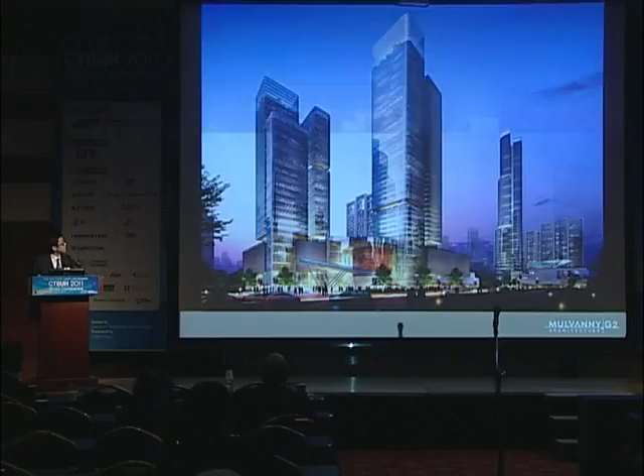Here I can share some of the projects we have designed or that are on the design board. This is the Suning Chengdu Plaza, which I'm going to speak more about in detail today. This is the Wuxi Chong'an mixed-use development with twin 250-meter tall towers and a 6-floor retail base. And the Suning Beijing Plaza. And again, Beijing Chaoyang CBD expansion, master planning. And the China Resource Qingdao mixed-use project.

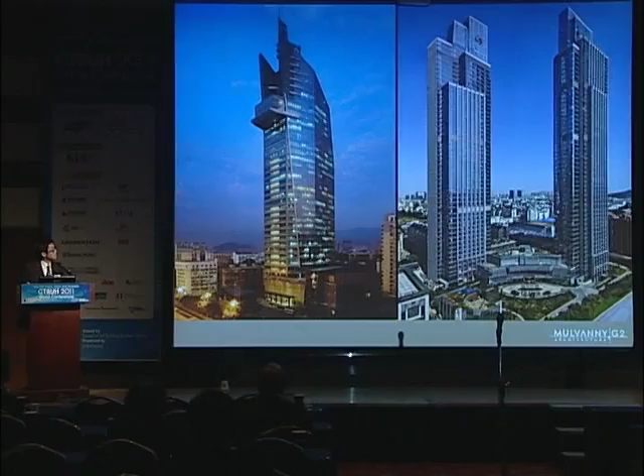And Bayview Towers in Washington State, also the first LEED gold certified residential towers in Washington State. On the right is the Suzhou Sunny World, twin 50-story towers with retail, restaurant, and club base. And Xi'an Daming retail mixed development, totaling over 2.5 million square feet.

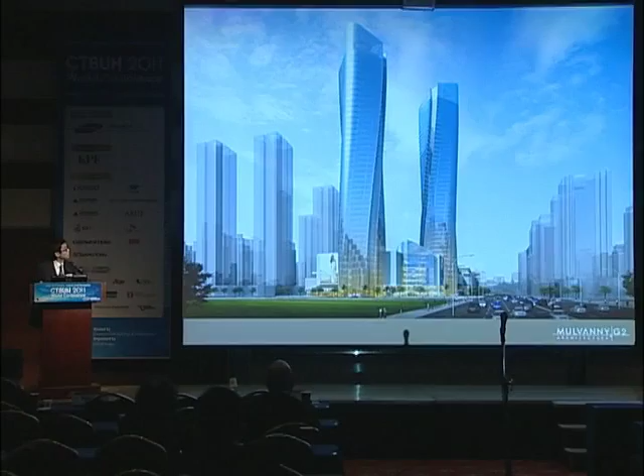As everybody knows, mixed use is a very complicated program and requires a lot of design strategies. Today I'm going to share some of the most important strategies we apply in our mixed-use design.

First is humanity. All mixed-use projects are about creating synergy for a destination, so it's very important to create life, especially at the street level. I think some speakers already mentioned that. So how do we respect human behaviors—everybody wants comfortability, everybody demands convenience. They like to have exciting, fun, social space, but also some private, quiet space. And they like to have adventure space, but it also has to be safe.

And of course, all mixed-use development critically depends on how to make sure the economic effects are met, and it has to be affordable for the people who live in the city.

The second important design strategy is cultural relevance. Great communities and cities exist because of thousands, hundreds of years of history, and people are very much comfortable living, working, and playing in this kind of environment. So how are we able to respect the local history, the local culture, and also critically, how do we interpret what it means to create an urban space in today's time and also in the future?

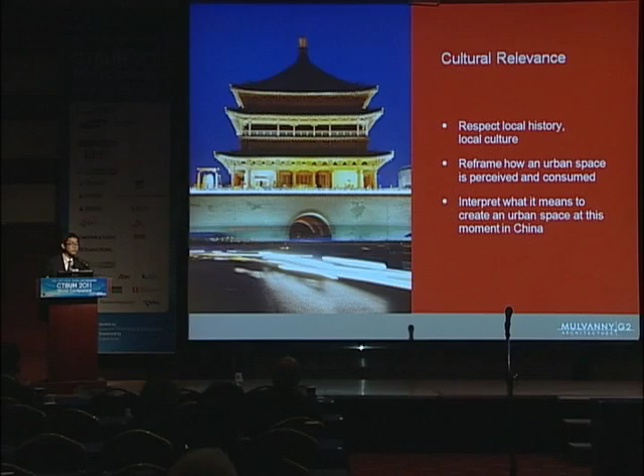Last but not least is sustainability, and as everybody has emphasized, it's so important. If you think about a mixed-use development, it is in itself a very sustainable approach, rather than spreading very horizontally, which takes more effort in transportation. Here we try to create a walkable, very robust community.

Without needing to travel to different places to serve your purpose. But beyond that, we have to look at the long-term strategy for both business and environmental needs, and also how to be relevant—making sure this approach is very relevant to the local culture or climate, and integrate all this together at different scales.

Next I'm going to use, hopefully if I have time, a couple of case studies. First is the Suning Chengdu Plaza, which just completed the relocation process. This project is located in the old commercial retail district, probably one of the most expensive land areas in the city.

As you can tell, it's a very tight site. We try to solve a very complicated, almost 2 million square foot project on a very tight site, with FAR over 15. Also, how are we able to let a world-class retail center coexist with the relocation of existing retailers, which are smaller local vendors—how can these two coexist in such a tight location.

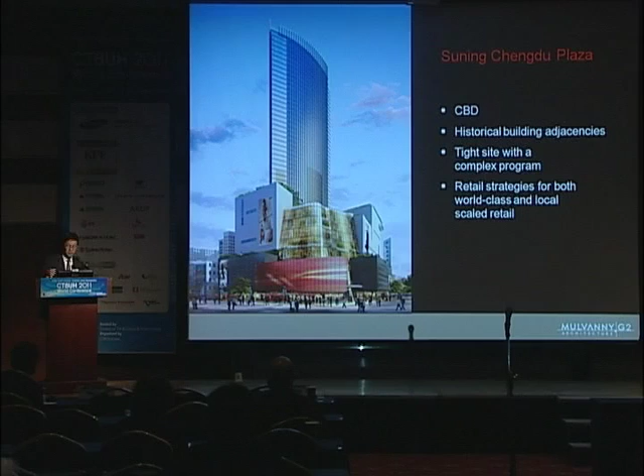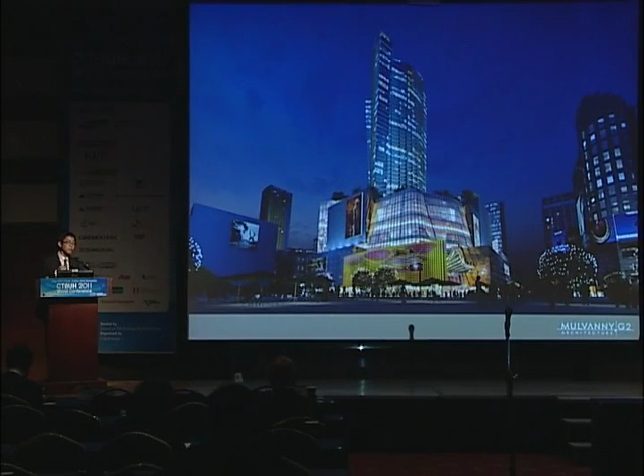And also there's quite a few historic buildings adjacent to the site, so we make sure to respect this context. This is a night view, shows how important the lighting design, the LED, and also the commercial graphics really help to create that destination for the city.

And interior shot really focus on bringing the daylighting from both the skylight and also from the exterior wall, so it really penetrates all the way through inside at this atrium space.

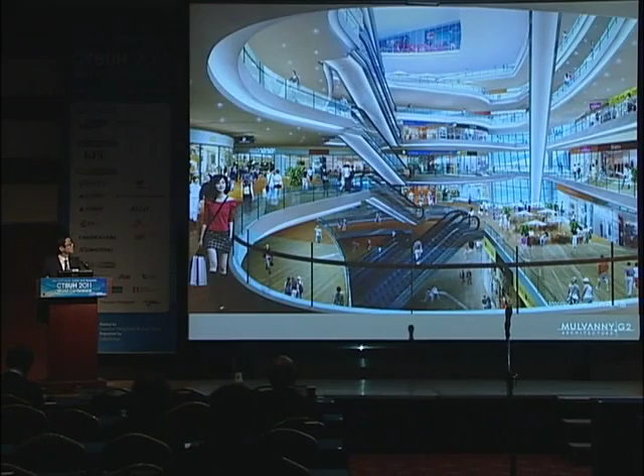So briefly, the city of Chengdu is pretty much in the middle of China, and also the site is based pretty much in the middle of the city of Chengdu. So that's the site.

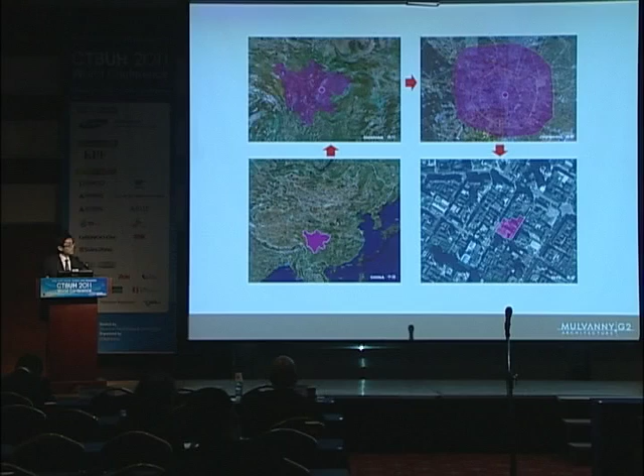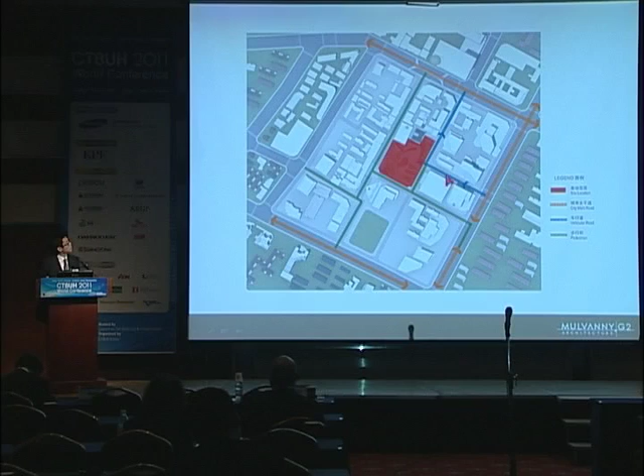And as you can see, this site is really in a major old commercial retail street. So all this green is a pedestrian walking street. Only half of this street is accessible by automobile, it's a one-way street, so the rest of this is all pedestrian street.

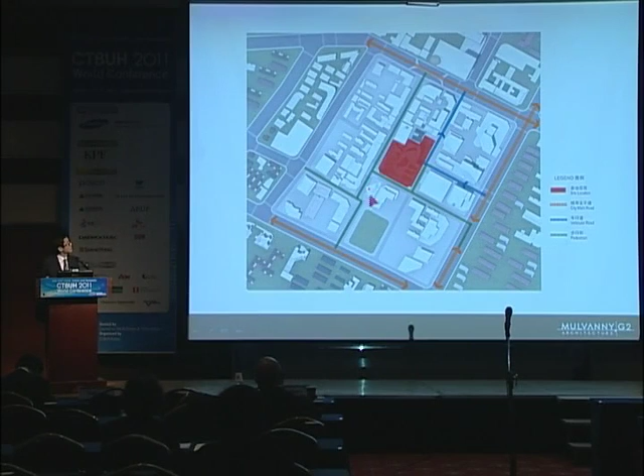So it's kind of challenging trying to solve all this into one very tight site with limited auto access. And on the south side there's a city plaza, and on the north side is this historic building, the YMCA.

So the initial planning diagrams really try to turn the challenges into inspirations, like this three-sided site really becomes a major access for all the retail. So we provide a retail entry along all the site, and also take advantage of this south city plaza, becoming part of the main retail entry experience.

And relocate and put the most luxury brand special retail stores in this most expensive corner, put the anchor store more in the secondary corner, but still with enough pedestrian access from different sides of the street, and put the hotel and office towers along this access by vehicle, just to make sense.

And also the relocation on the back side, taking advantage of this emergency fire lane, turning it into an open, traditional local market street experience.

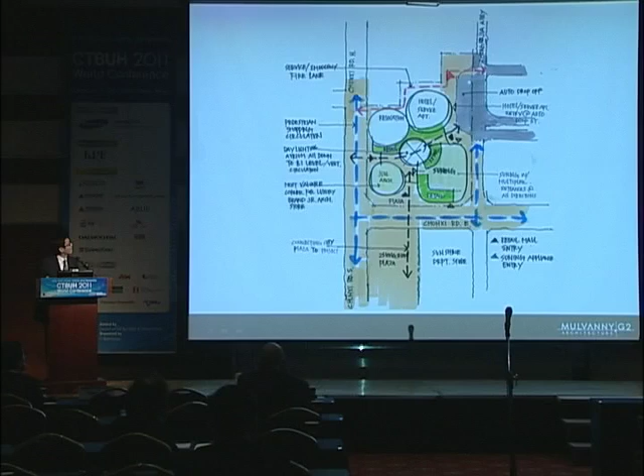This is more defined in a transportation traffic diagram. Another thing to mention is creating a sunk plaza there, which really not only exposes the historic building, but also creates direct access to the retail at the basement level.

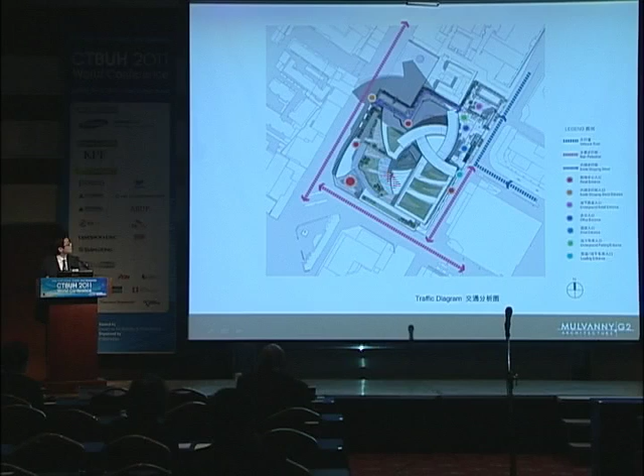Really taking advantage of this, the roof gardens put a lot of green and water, becoming part of not only the sustainable approach, but also an amenity space for all the public and the hotel facilities.

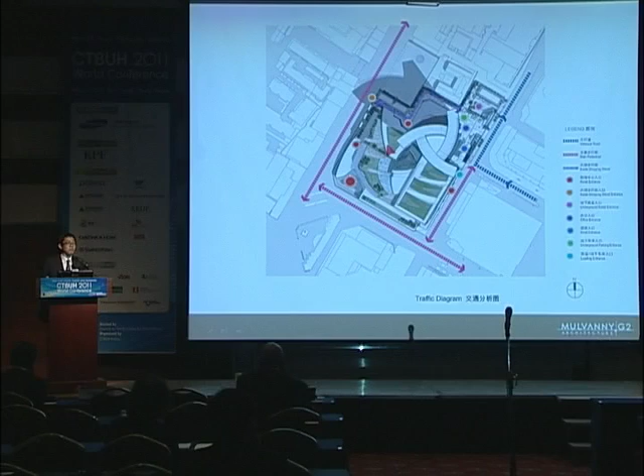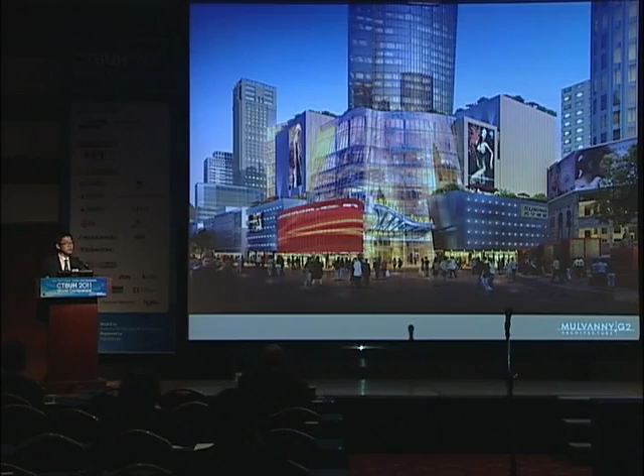And also the material, using dark gray terracotta, which is immediately related to the traditional dark gray brick buildings, but in a modern and durable, easy to maintain way.

On the north side, we create another plaza here, combined with the porte-cochere for the hotel and also the office, exposing this historic building into the street directly, and also creating this sunk plaza, immediately bringing the traffic, also connecting to the basement retail experience and creating daylighting for the retail shopping experience.

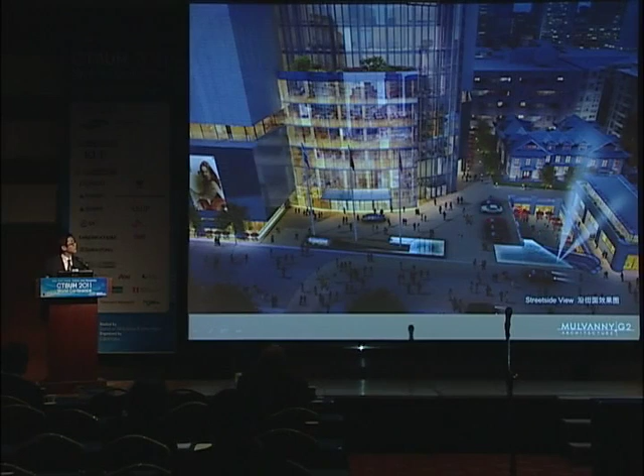The tower concept is really inspired by the two major city culture and history. One is the city logo, a golden plate discovered in the Jinsha relics, which is 2,600 years old. And the same thing is the city flower, called the cotton rose, which has been with the city for over 1,000 years. Both forms are very symmetrical, but offer very dynamic forms rather than static form. So this really inspired our tower design.

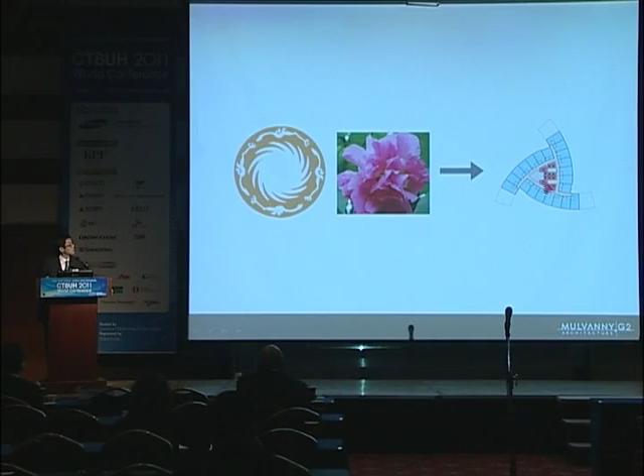The tower form is very appropriate because this is the center of the city. So how to take advantage of the 360-degree views of the city, and also this tower could be constantly viewed by people on different sides of the city. There should be no backside of the facade, so the symmetry form really works very well with this tower. Structurally it also makes sense because structural engineers prefer symmetry with the central core in the middle, and also the outriggers at the mechanical and refuge floors.

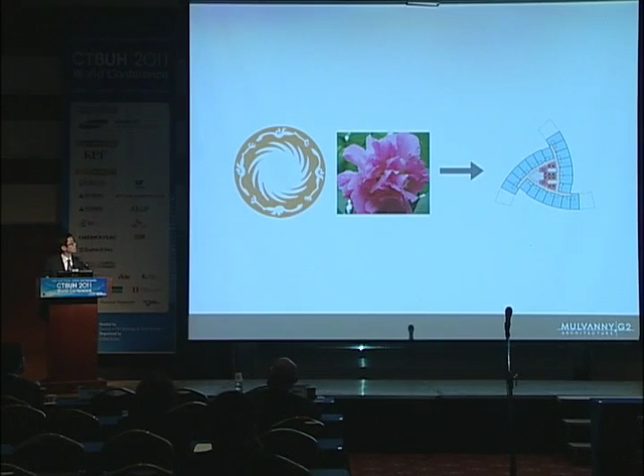These are my initial design sketches, and they turned out to be the final design products.

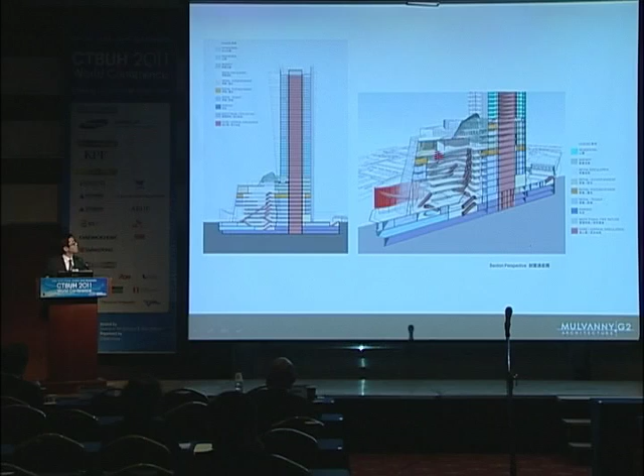This section shows the relationship between the retail and the tower, and how we merchandise the retail with a restaurant, entertainment, and ice rink on top of the building, with the hotel function at the very top.

Again, it's about creating a retail space. Retail is very important for this project because it is in a retail district. So how to create a very logical retail space in a 9-story podium is very critical and very challenging.

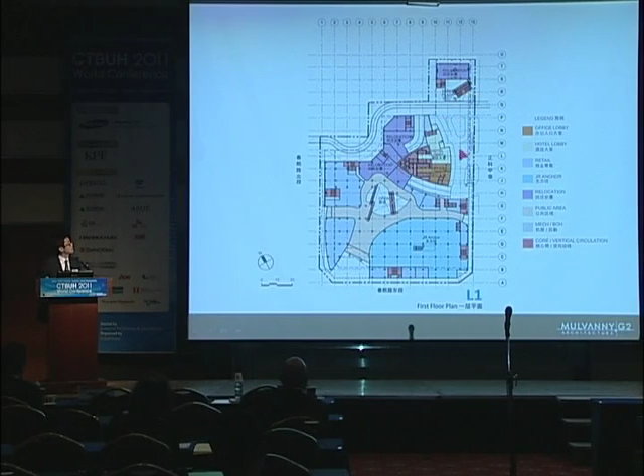The second challenge is how to mix this relocation facility together with a very modern retail shopping center. So by taking advantage of the backside emergency street, we put the relocation there, creating a local flavor shopping market. Also, by putting the relocation in the first floor basement level with direct access from outdoors, they coexist very well, but can also easily be operationally separated from the main retail center.

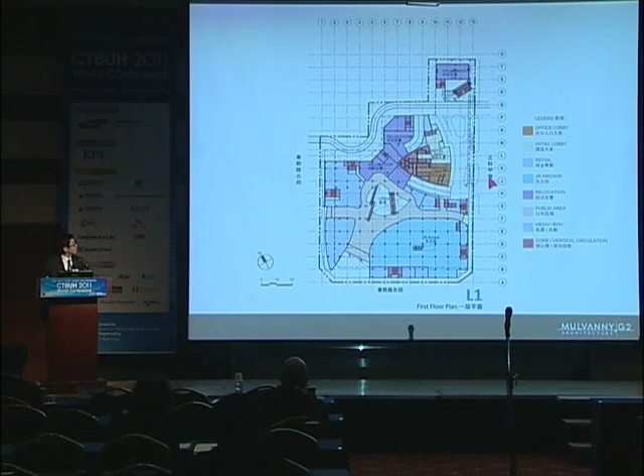The hotel floor is at the 9th floor, with the ballroom, lobby, and restaurant taking advantage of the roof gardens. This roof garden not only serves as a green approach, but also serves as outdoor amenities for the hotel and the public. This way, we free up the most valuable lower floors for retail purposes, and use the roof gardens as hotel amenities.

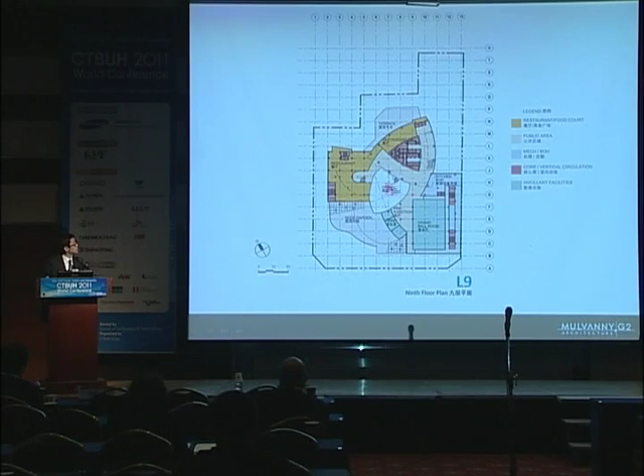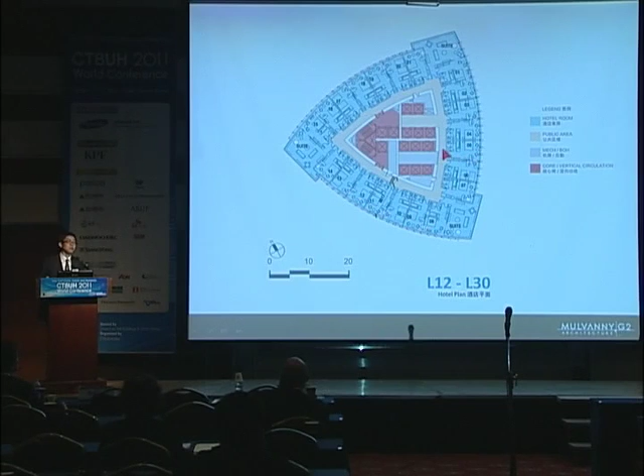So the tower orientation, with this arced form, has 2/3 of the tower facing the most desirable orientation from southwest, south, to southeast. This orientation really helps reduce the usage of energy.

From there, we come to some of the sustainable approaches for the building. I mentioned that in any real project, we have to respect the client's strategies, demands and needs, and balance that with our ideal situation.

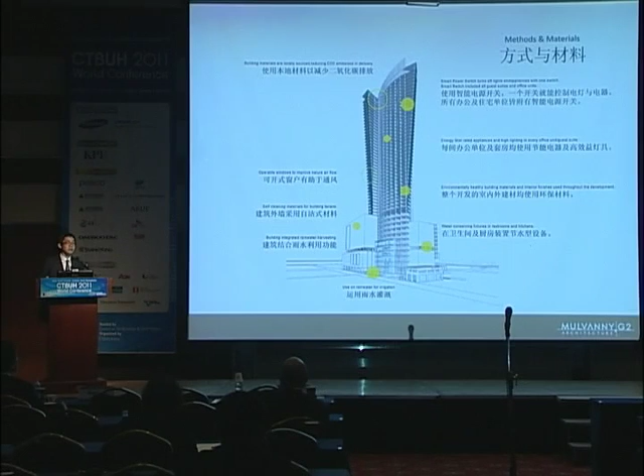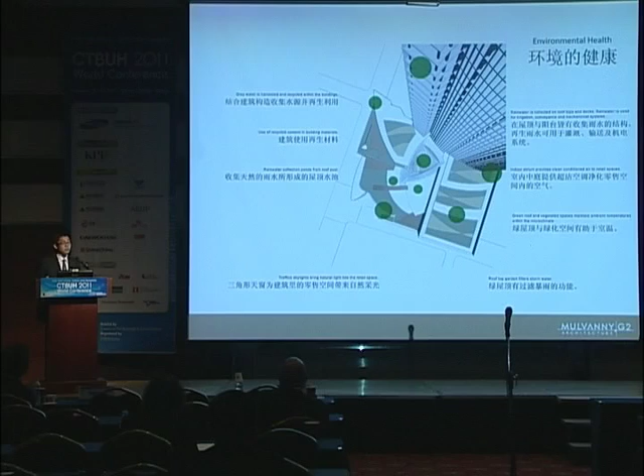Here we try to take advantage of passive solar design approaches. For example, the roof gardens not only help reduce the heat island effect, but also become part of the public amenities. This kind of approach really helps create value for the clients. For energy use, we try to take advantage of both solar and wind, and also earth energy.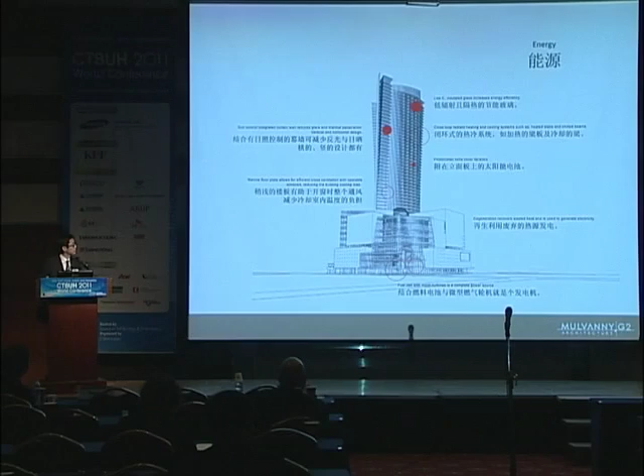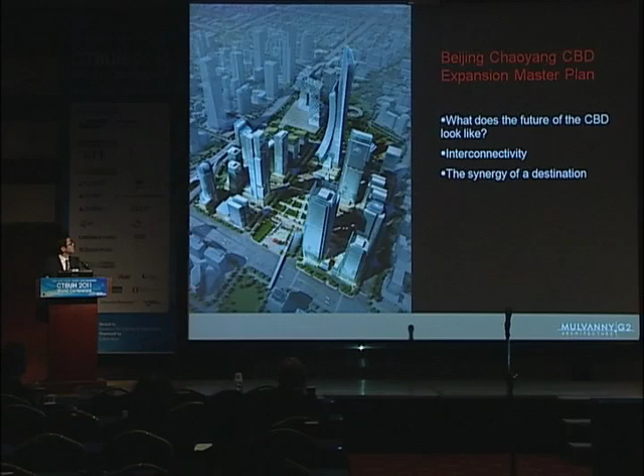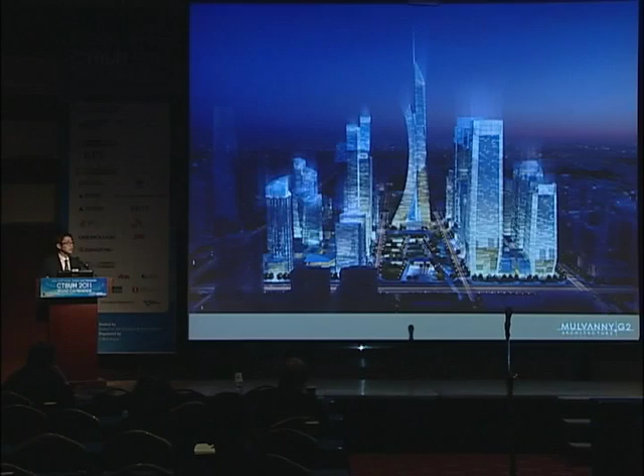Next, I'm going to present the Beijing Chaoyang CBD expansion. I have limited time here, but this project tries to help the city put its ambition into action, signifying its importance in financial leadership and creating a kind of future CBD for China as a model.

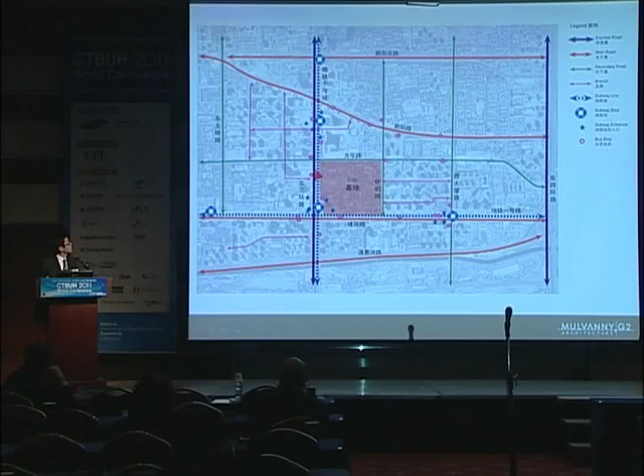The site is about 15 to 23 hectares, 2.5 million square meters, 15 city blocks. The existing CBD here is separated by the number 3 ring freeway, and the existing land use is mainly for commercial purposes.

So what is the future CBD for not only Beijing, but any city in the world? We really think it has to be a very memorable experience, has to be very sustainable, has to be culturally relevant, and has to be Beijing specific.

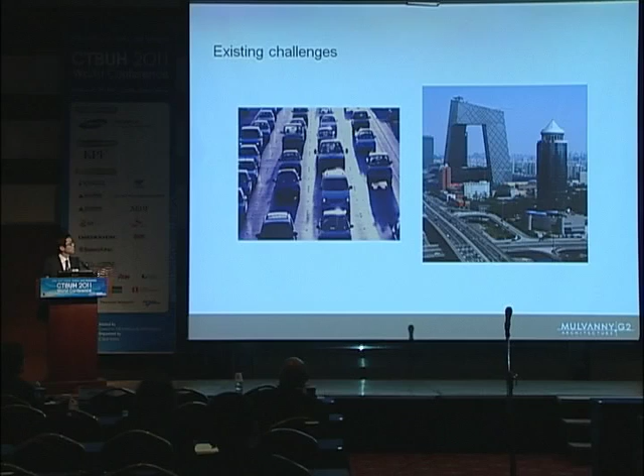So some of the challenges, like I said, this number 3 ring road really separates this new CBD from the existing CBD. And traffic is always a major issue for Beijing, so how are we able to create such a big complex without bringing more traffic to the city? It's about how to open more public open space to this phase 2, because the phase 1 CBD has very limited open space, and how we integrate more Beijing culture into this complex.

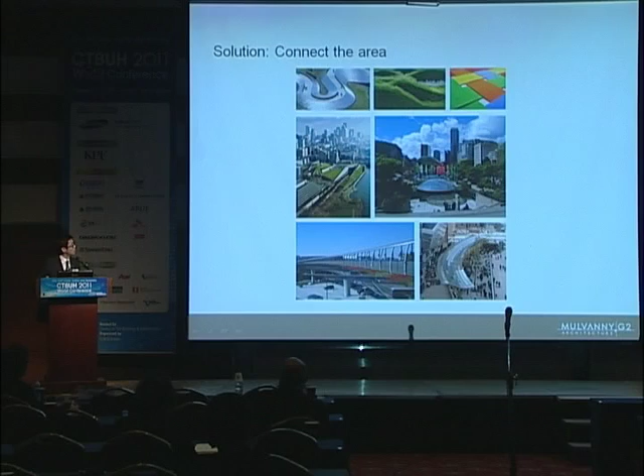So one solution is basically connection, because we try to connect the site with, between new and old, and also among the existing and the new 15 blocks. We proposed a looped light rail system which ties our site with some of the major city subway system and connects to the east and west CBD, the north side expansion, and the future east side expansion. Also the green and pedestrian system connects the old and the new, and is part of the overall city green belt system.

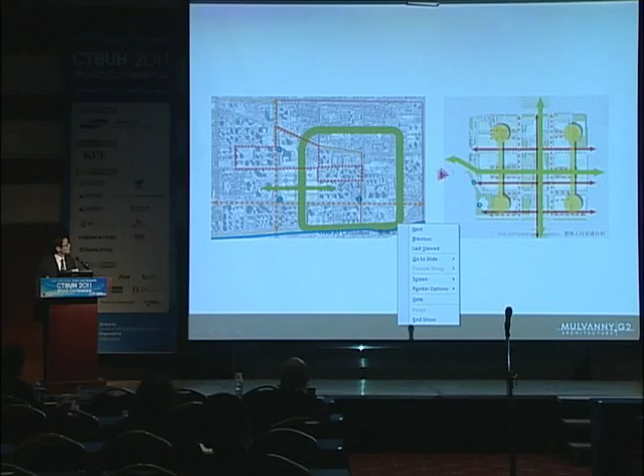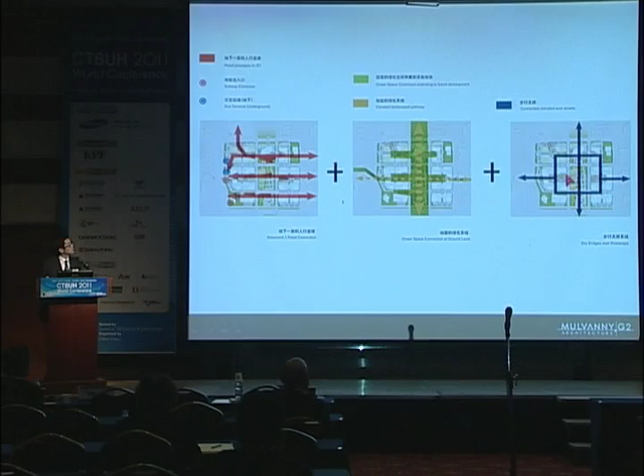So the connection happens through multi-levels. At the basement level, it really ties all these blocks with the major city transportation system. On the street level, it ties this green space with the major city belt street. And at the sky level, through bridges, it connects all the building blocks and also ties with the existing CBD over the freeway. So these are some of the major connection approaches.

And it has to be a place people want to be. So the way to do that, rather than just limiting it to major financial and Fortune 500 headquarters, we introduce 24 hour activities, truly mixed-use development, by adding more retail, more culture-related open space, museums, ice rinks, hotels, and service apartments. So it truly becomes a mixed-use development.

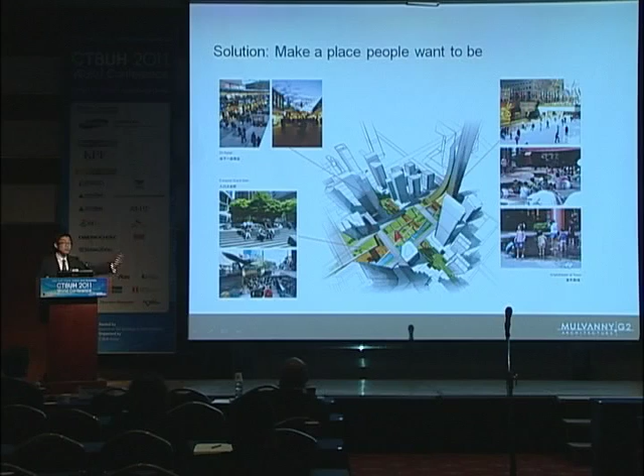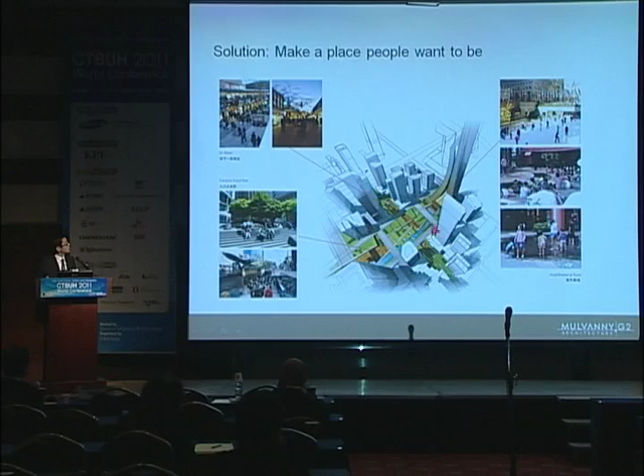So some examples of this are the ice rink in front of this iconic building, and the amphitheater, which connects the street level all the way to the basement shopping level, creating a lot of open courtyard space. Again, this brings sunlight into the basement retail experience, but also connects all the building blocks. And the Central Park really creates a major boulevard, giving more of a corporate address for all the city blocks.

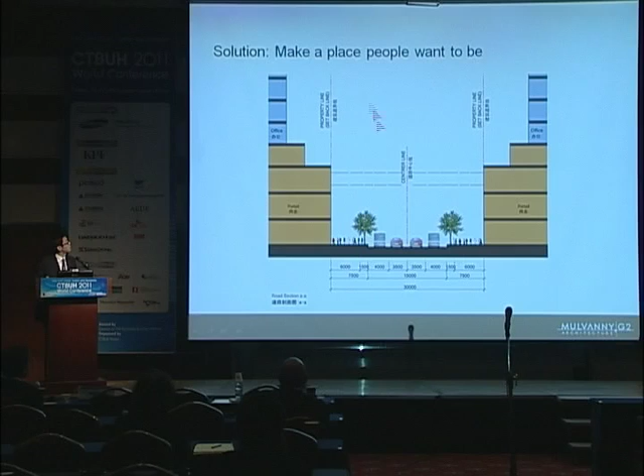Again, we create a comfortable streetscape, really bringing daylighting into the street to make pedestrians feel less threatened by all these tall building walls, by setting the buildings back as they move up.

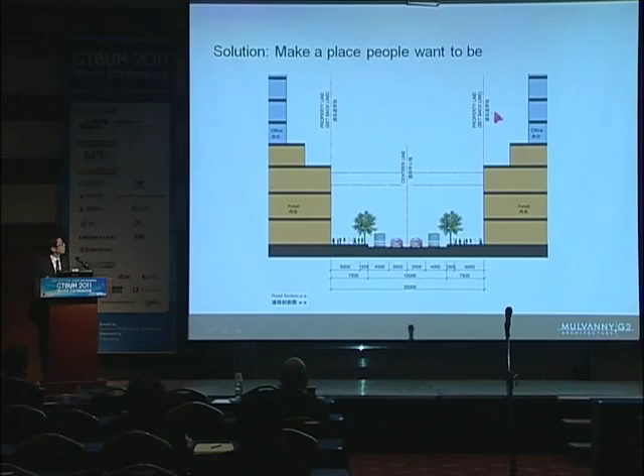This iconic tower sits along the major axis in the planning, really opening it up. You can see it connects the south and north through this open, clear glass atrium space, connecting the basement retail into the above-ground space. All these connections are clearly expressed in this rendering.

And just like I mentioned briefly, we create a place that businesses want to be. New York's Central Park is a great inspiration, creating this kind of address for all these buildings.

The iconic tower, which is 450 meters tall, will be the tallest building in Beijing. It's really inspired by traditional Chinese calligraphy, that solid versus void. So we take advantage of this void space to create open space there, not only visually tying the green belt all the way from south to north, but also physically connecting south to north without blocking the overall city planning concept.

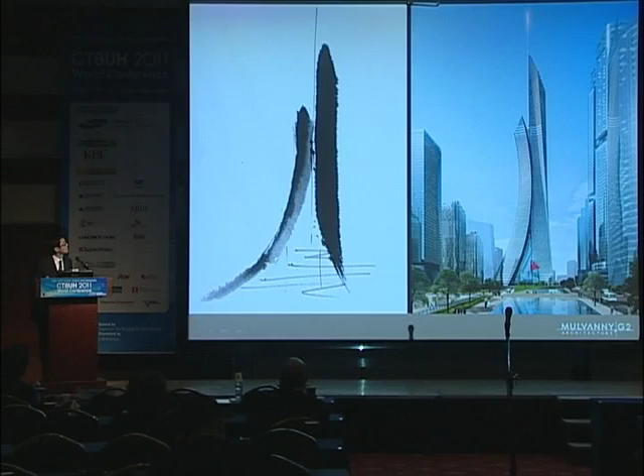So again, this is the sustainable design: the Central Park really creates open space and reduces the heat island effect, purifying the air quality in this microenvironment.

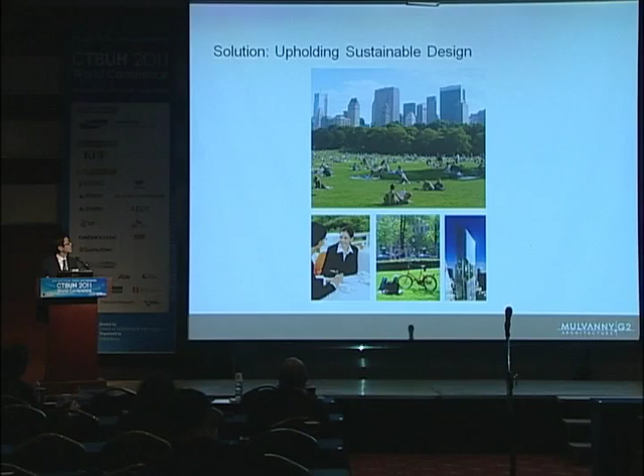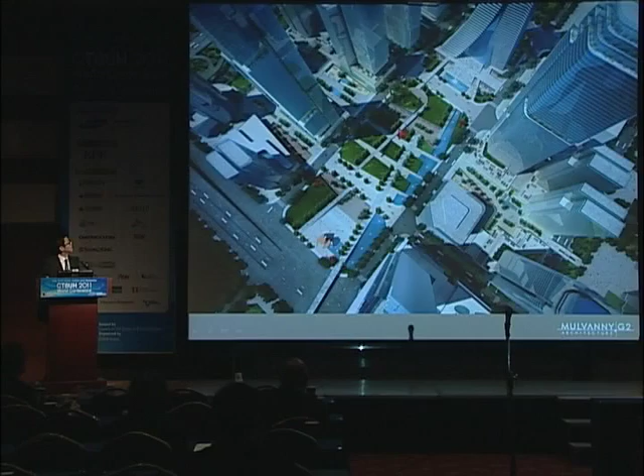And even green roofs are applied to all these service apartments. The Central Park concept, with all these different courtyard concepts, really ties this whole park system together with water and public art, and museums somewhere here. So that's some of the systematic approach for the sustainable concept.

Taking advantage of the wind, the solar, and also the earth as major energy resources.

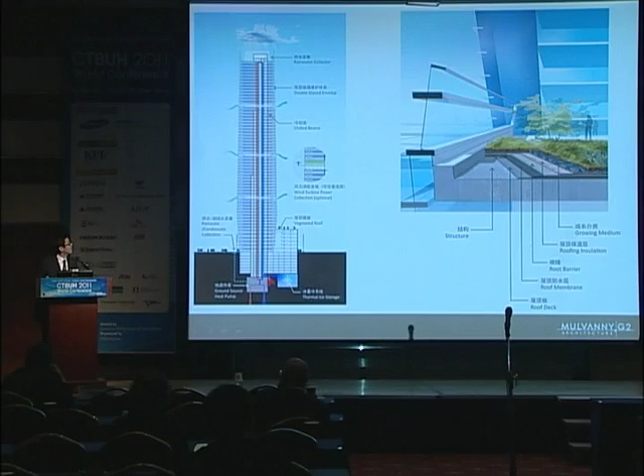So in conclusion, we tried to create a very energetic urban mixed-use development through this humanity, cultural relevance, and sustainability approach. Thank you very much.